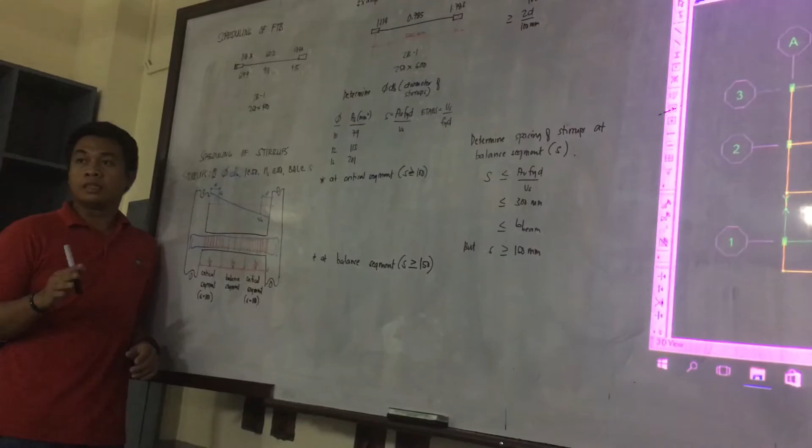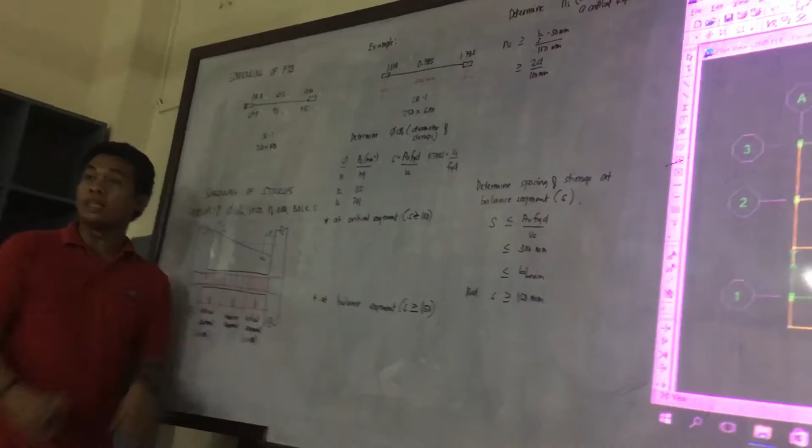Ay, nako naman talaga, oo. Okay, pero sige, I'll add it in. The scheduling of tie beams, the method is different compared to beams in the superstructure.

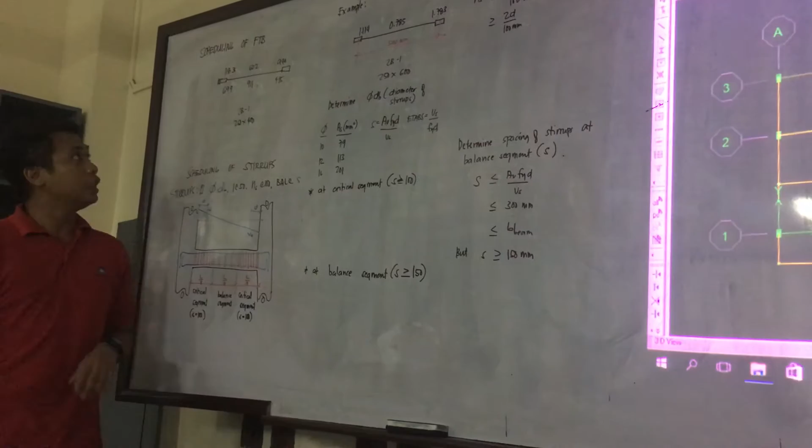Always remember that your footing tie beam is part of your substructure. It is part of the foundation plan. Since it's at the bottom, when there's an earthquake, it is subjected to stress reversal, as it's called.

Stress reversal. I'll emphasize this later on. Stress reversal, okay? Actually, that is the cause of liquefaction.

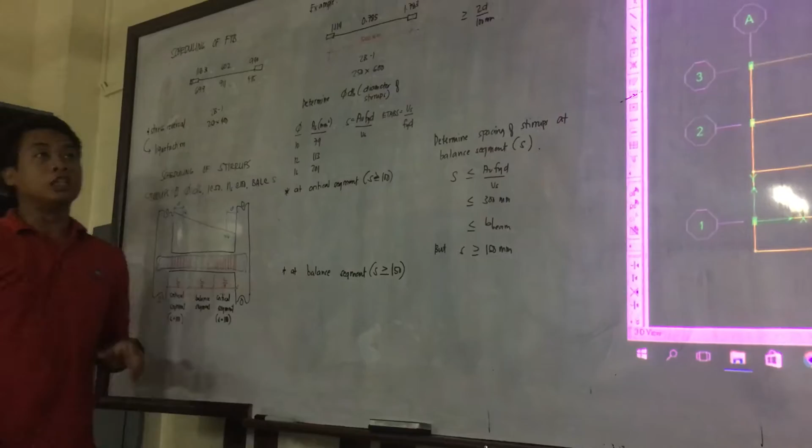Okay, but how do we schedule the footing tie beams first? Let's say, how do I do it? So, how do we schedule it? Normally, in a beam, what we consider is the highest AS.

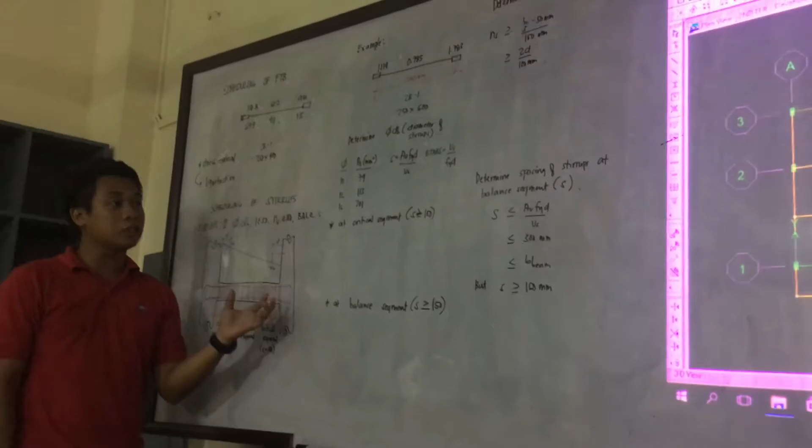Then, from the highest AS, we will determine the diameter of the rebar. Then, we check if it will fit the beam according to the specified spacing of the NSCP. But here, it's still the same. For the whole stretch of the footing tie beam, again, you will consider the highest AS.

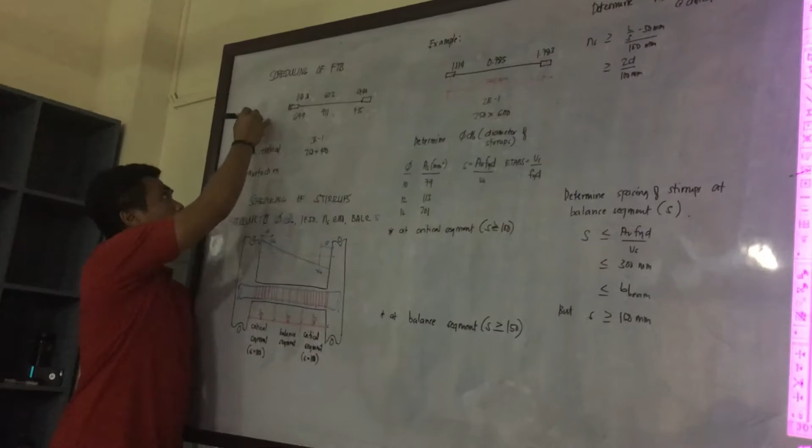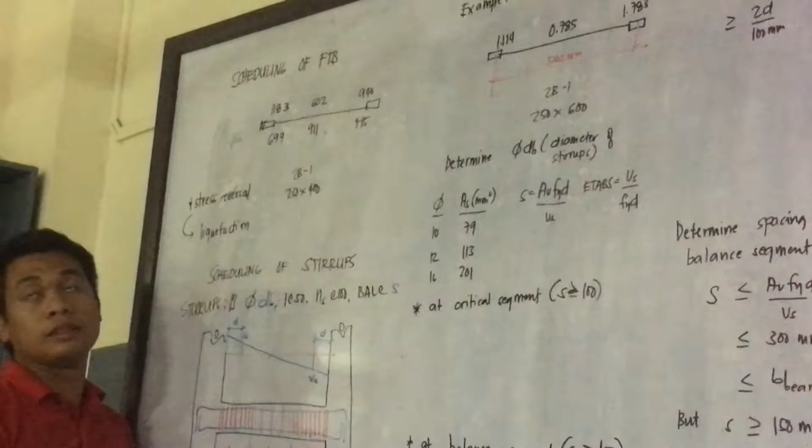So here, what is the highest AS? 1183. So if I supply diameter 16, supposing it fits, how many diameter 16 bars do I need for that 1183? How many? 6, because it's 5 point something, rounded up, it becomes 6.

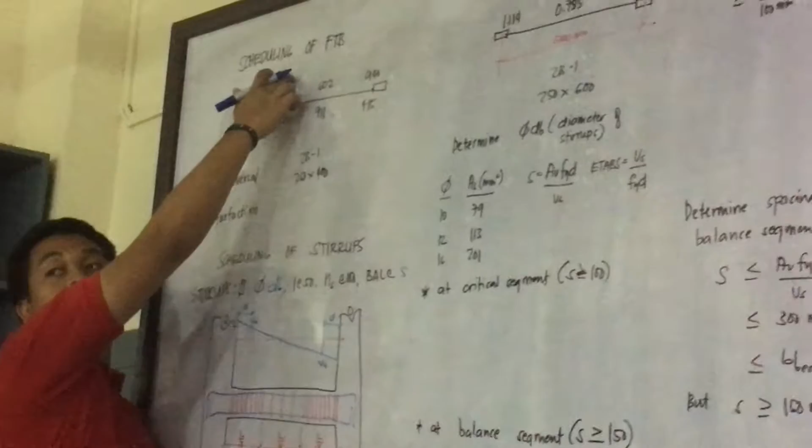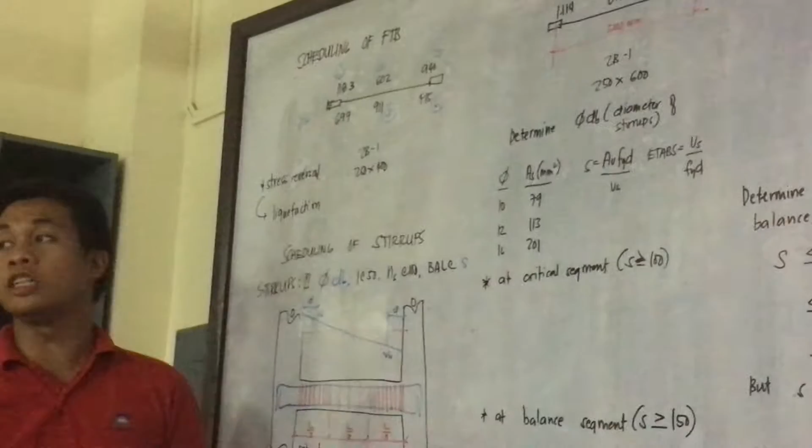Okay, when it comes to the footing tie beam, if the highest number of bars needed anywhere is 6 pieces, then 6 it is, all throughout. So it's easy to schedule a footing tie beam because you will only look for the highest AS, then all throughout, the quantity of bars stays the same.

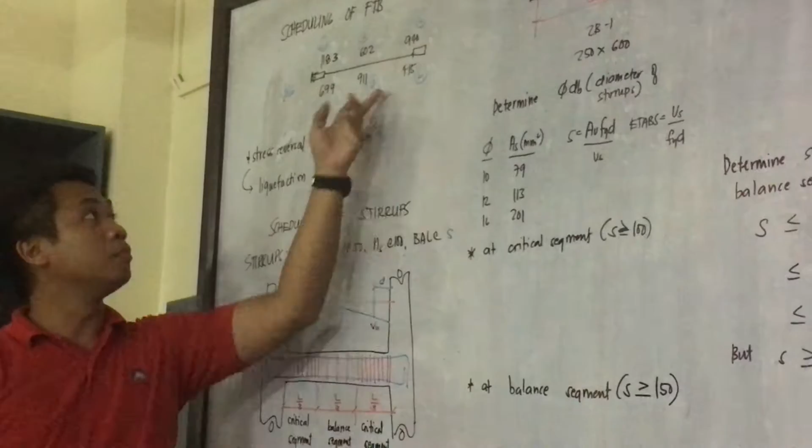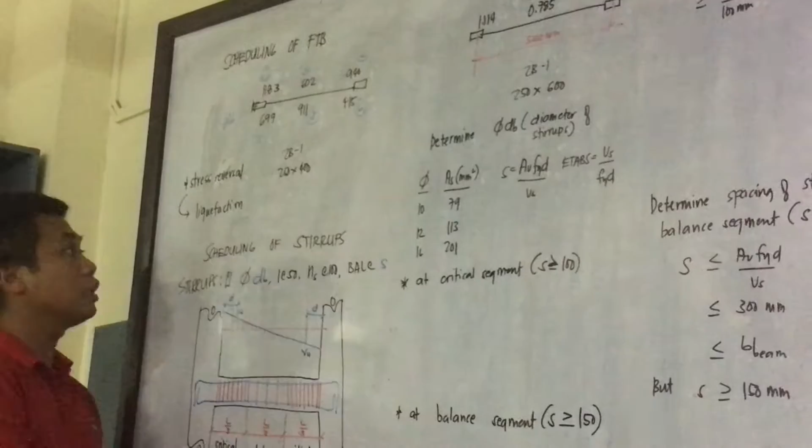Top bar and bottom bar, mid span, discontinuous end, or continuous end. Okay, later on they also put remarks. They put remarks. What is that? They put 'no splices.'

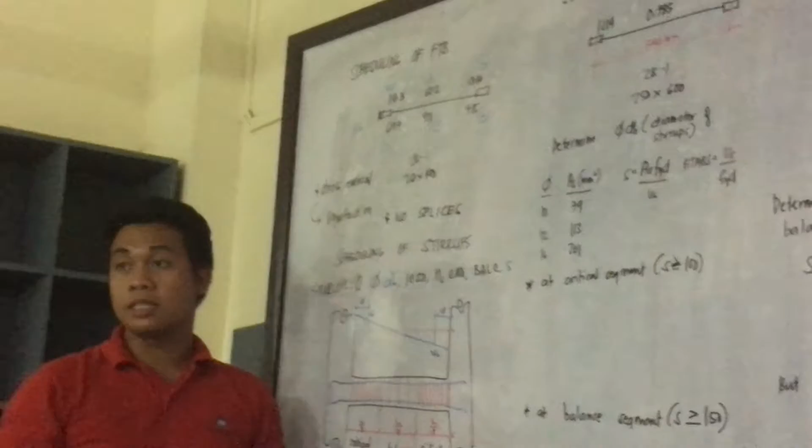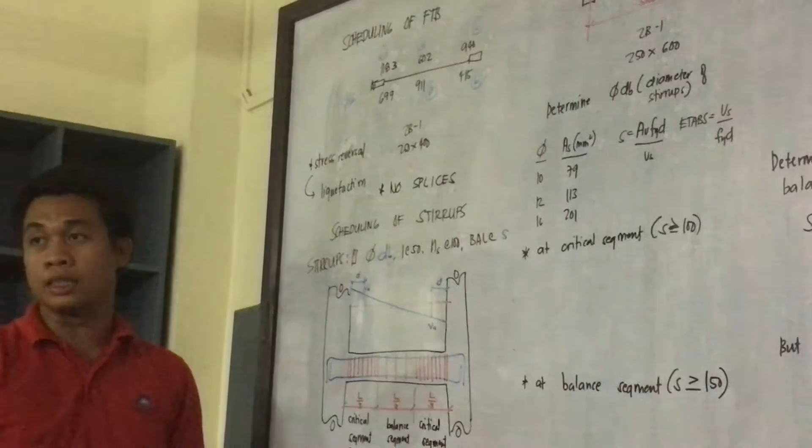Later on, I'll explain this, the stress reversal and the no splices. But let's jump first to the scheduling of stirrups.

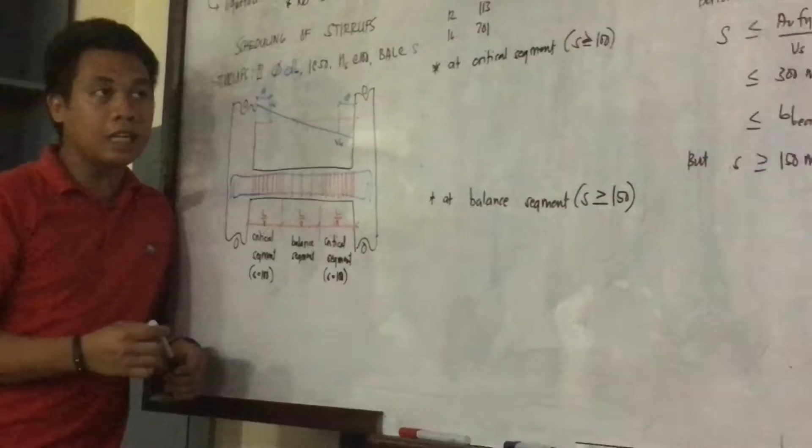Actually, this is the second part, scheduling of stirrups. So, where are stirrups used? They are reinforcing against shear.

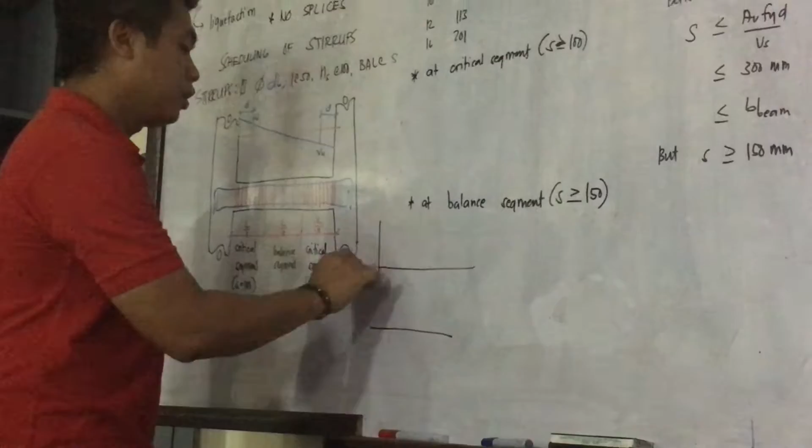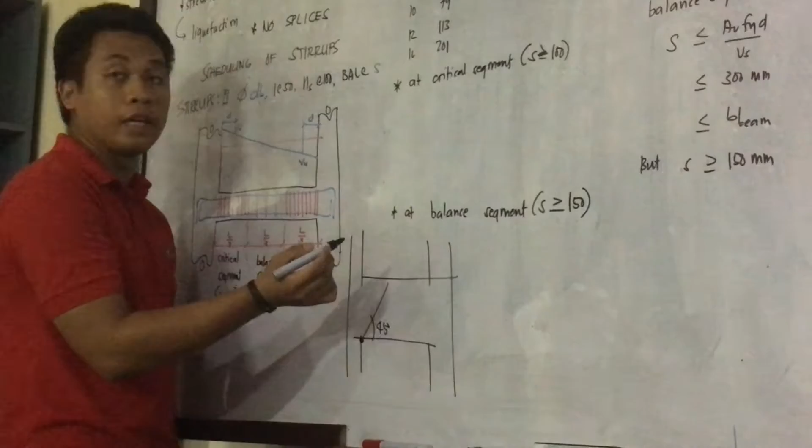Okay, the stirrup crosses it. Then the stirrup will resist the shear failure.

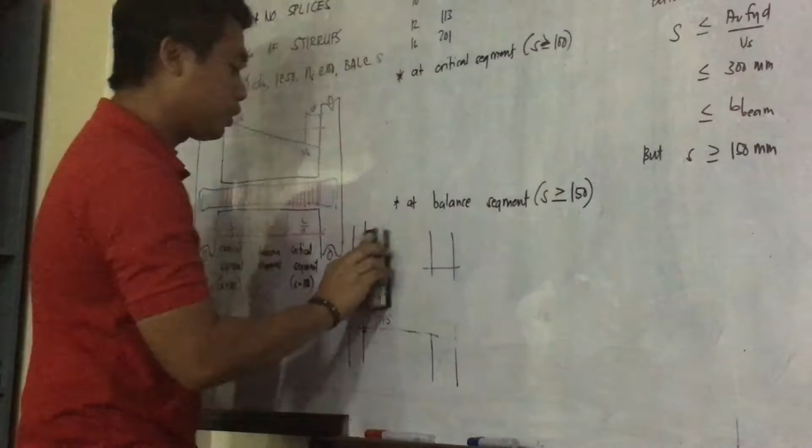Now, when it comes to ETABS, this is your run file. This is your run file. If you want to see the reinforcing of stirrups, we go to Concrete Frame Design, then Display Design Results.

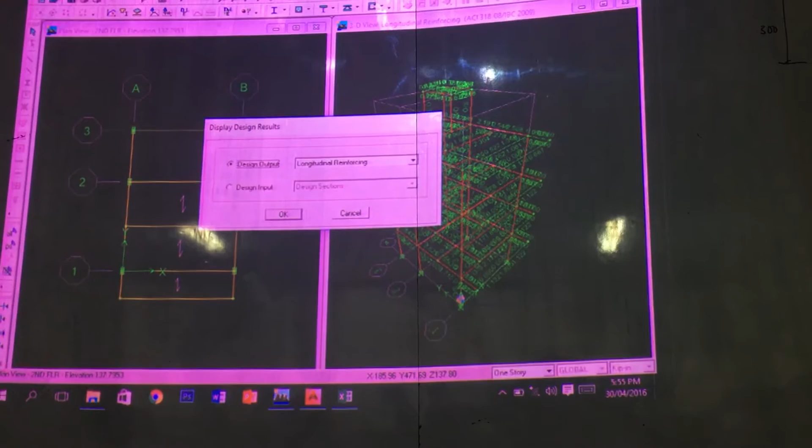Okay, when it comes to ETABS, the shear reinforcement, is it an output or input? Output, because ETABS should be the one supplying it to you. So, in the design output, you choose shear reinforcing, and something like this will show up.

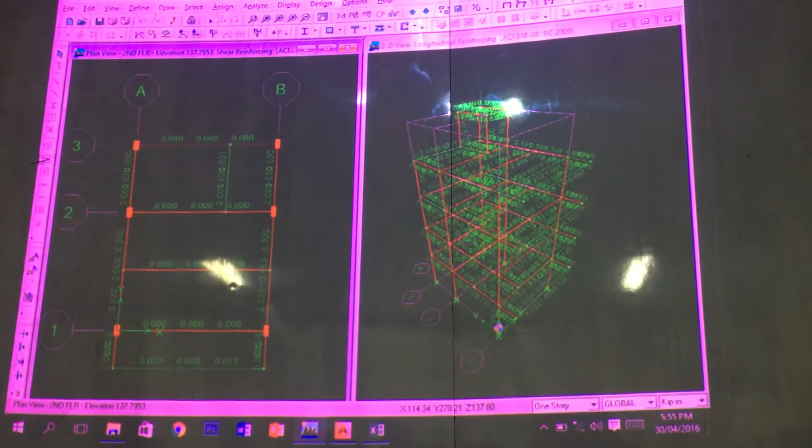Now, per beam, if you notice, how many sets of numbers will you see? Three. Okay, actually those 3 stand for the division of the critical segments of the seismic analysis. So, what is that?

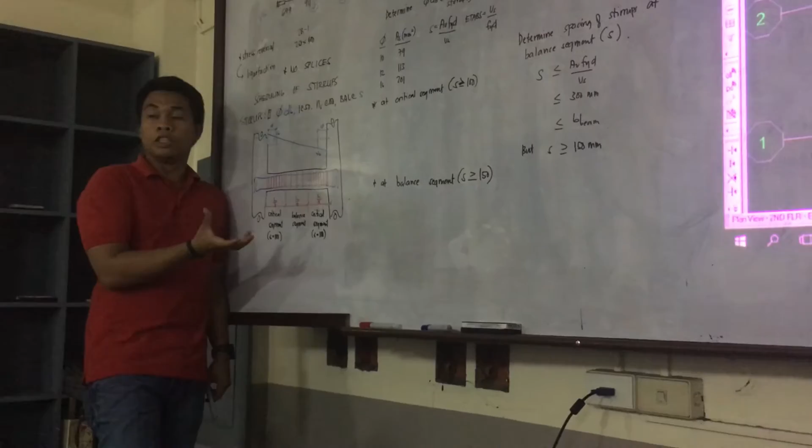According to the ACI, the critical segment will occur at L over 3 near the supports, according to ACI. So here, L over 3, L over 3.

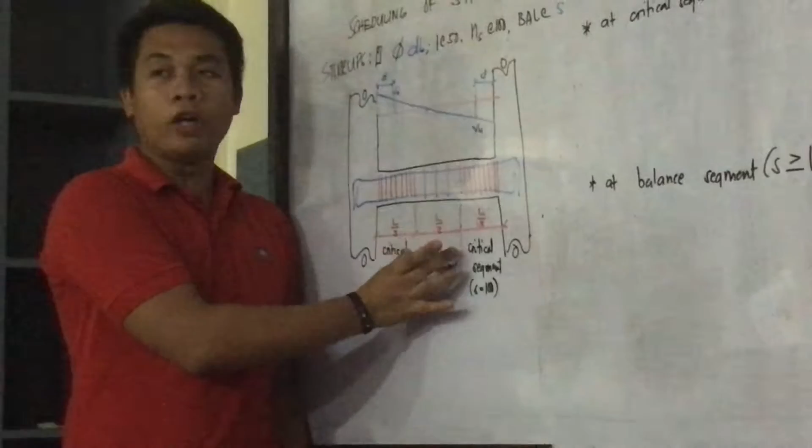Then, the remaining L over 3, that's the point where your shear is low, so therefore this is called the balance segment. These here, the L over 3 near the supports, that's called the critical segment.

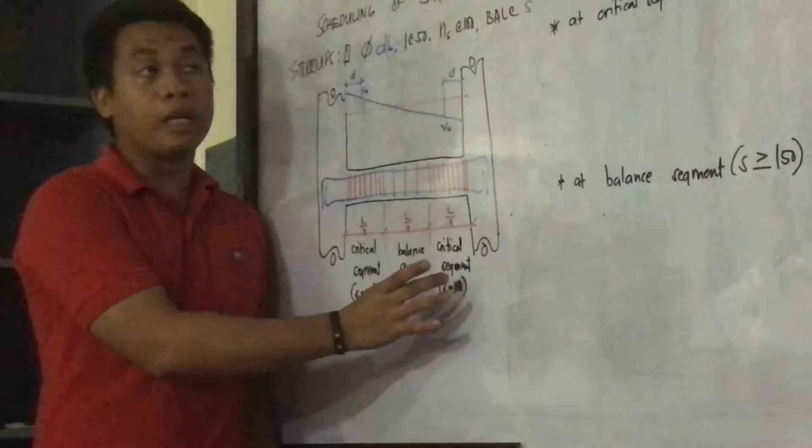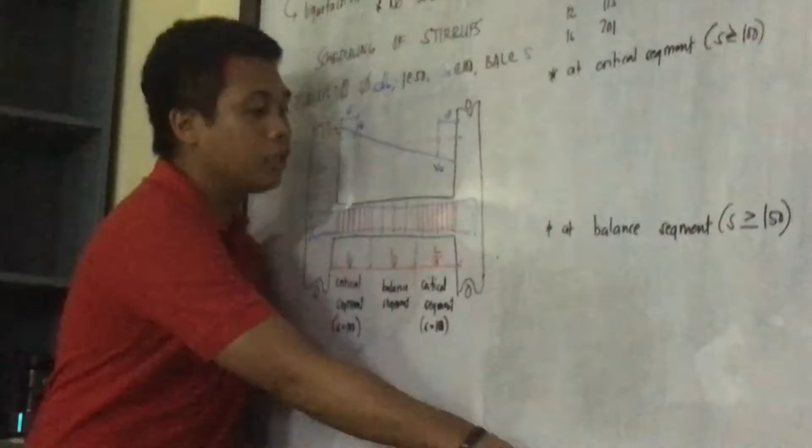Okay, when it comes to the critical segment, your spacing is fixed at 100. Okay, so all the stirrups here are spaced at 100.

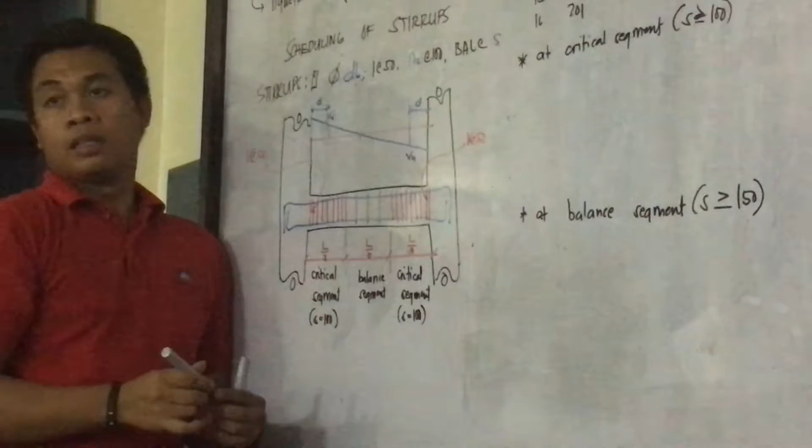Except for one, the first stirrup. Okay, the first stirrup, according to the NSCP, should be offset 50 mm from the face of the support.

So your first stirrup, its distance from the face of the support should be 50 mm.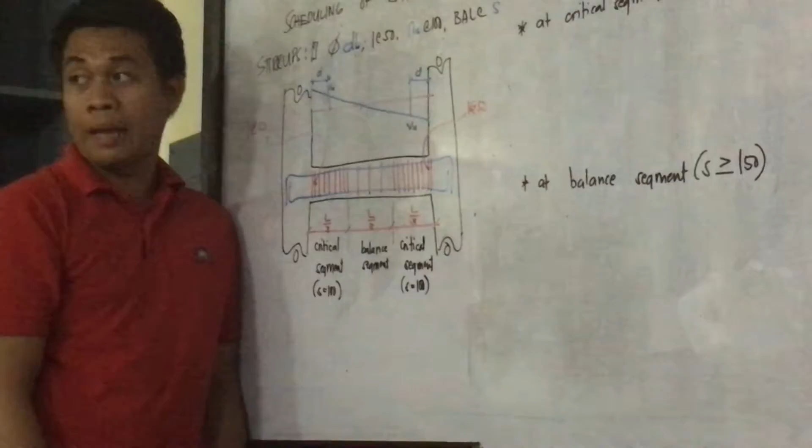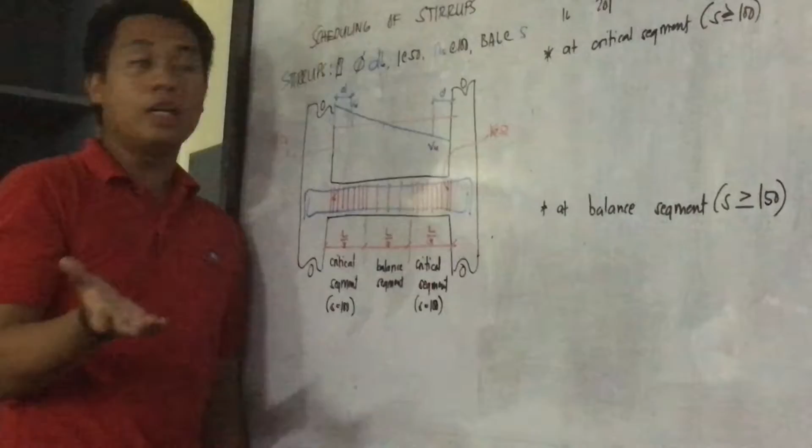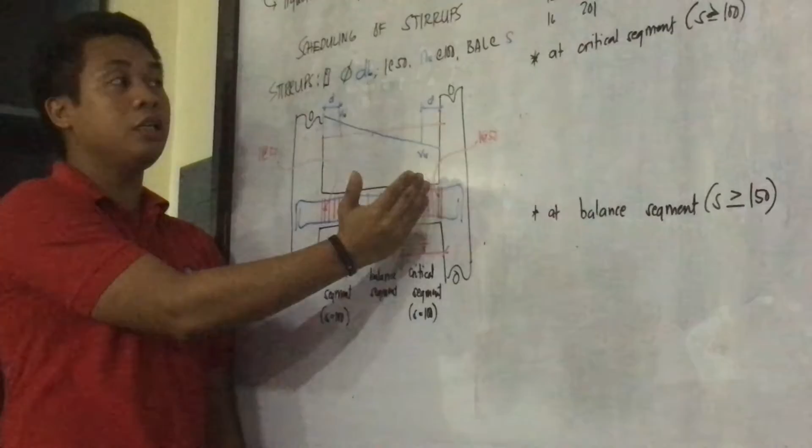First is the diameter of the stirrup, dB. Then 1 at 50 - that's the first offset, one piece, 50 mm from the support.

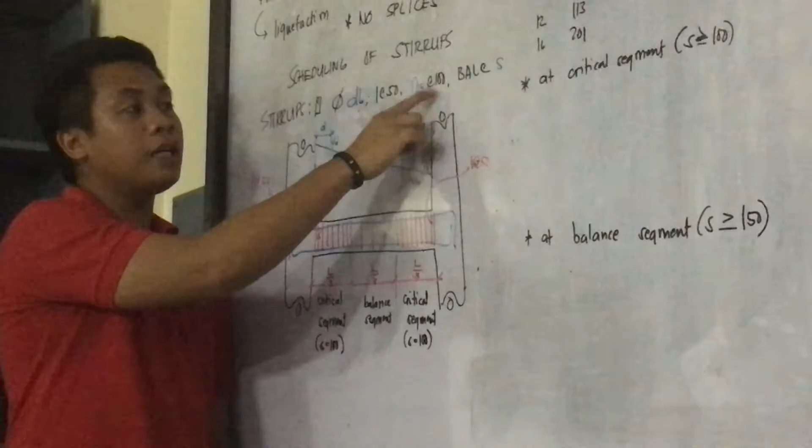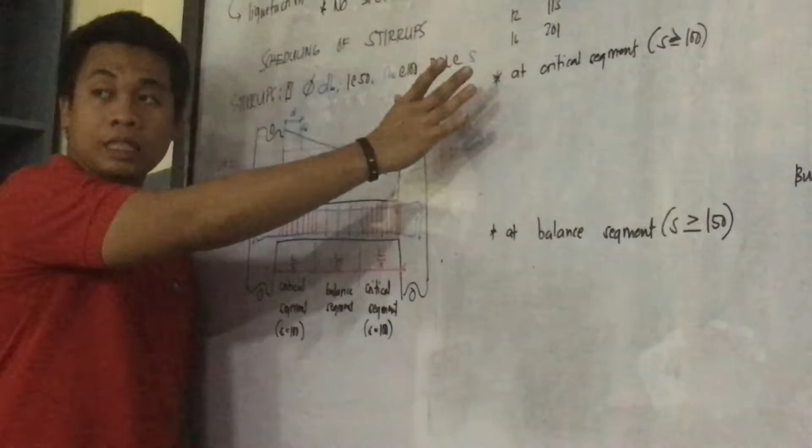Next, NS at 100 - NS is the number of stirrups at 100 on the critical segment, on both sides. Then the balance at S, where S is your spacing - the spacing on the remaining segment, which is the balance segment, serving as fillers in the middle.

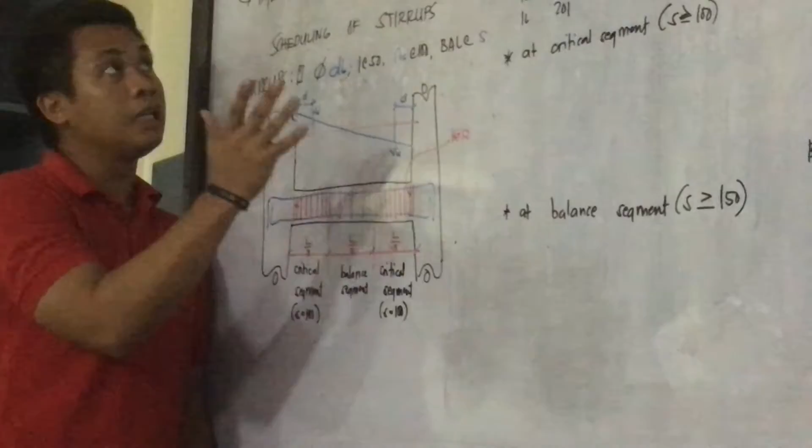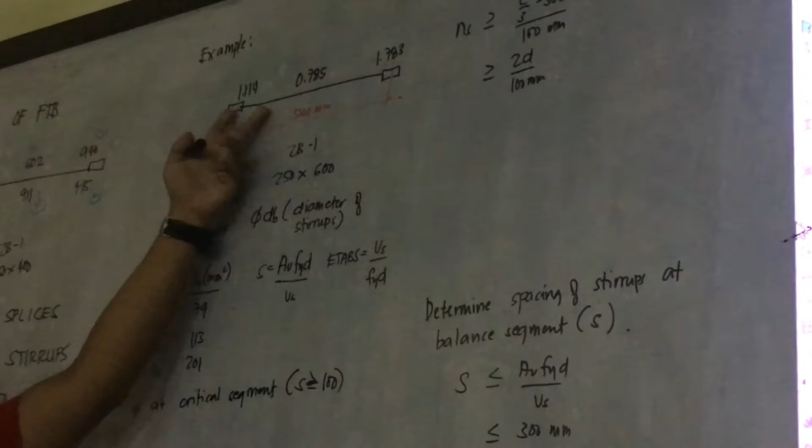Now let's have a concrete example. Here's the beam I've given, with its numbers. As usual, there are three outputs at two points - L over 3 of the beam. So this is 2B-1, with dimension 250 by 600.

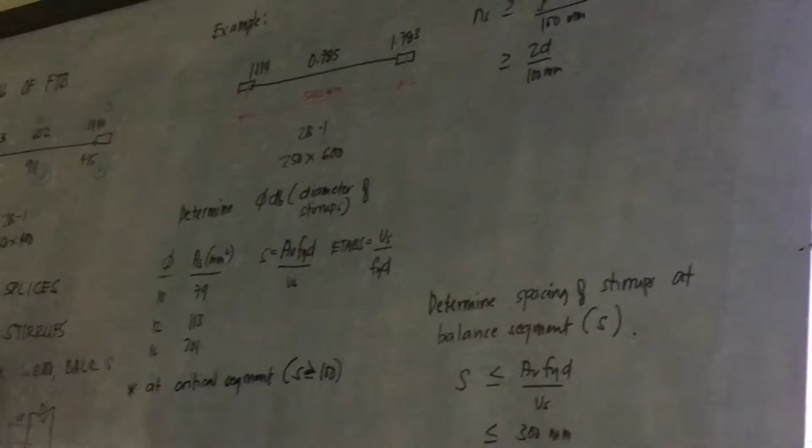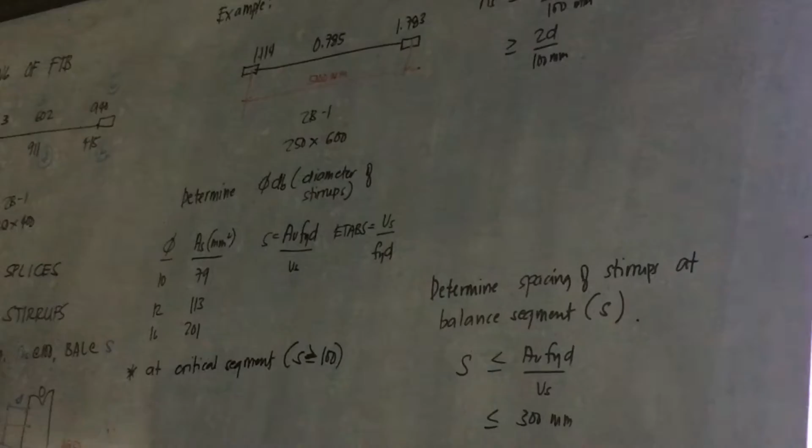So first, what we'll do is determine db, the diameter of the stirrup to be used. What are the diameters of stirrups we use on site? The sizes start at 10, then 12, and if it needs to be bigger, diameter 16.

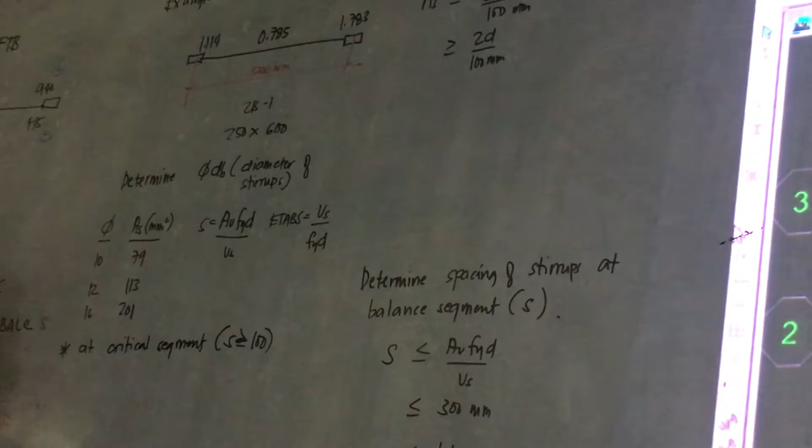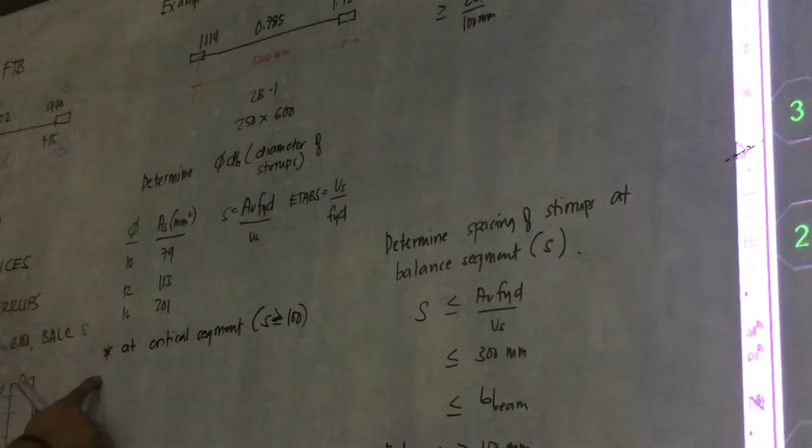Now, in determining the diameter of the stirrups, you need to consider both the critical segment and the balance segment. The critical segment - how many are there? Two, right? For every beam, there are two.

In the critical segment, you only have to choose one. So which one do I choose? Here are the values of the critical segment. Which do I pick, the bigger or the smaller? Actually, the bigger one - you will choose the higher value.

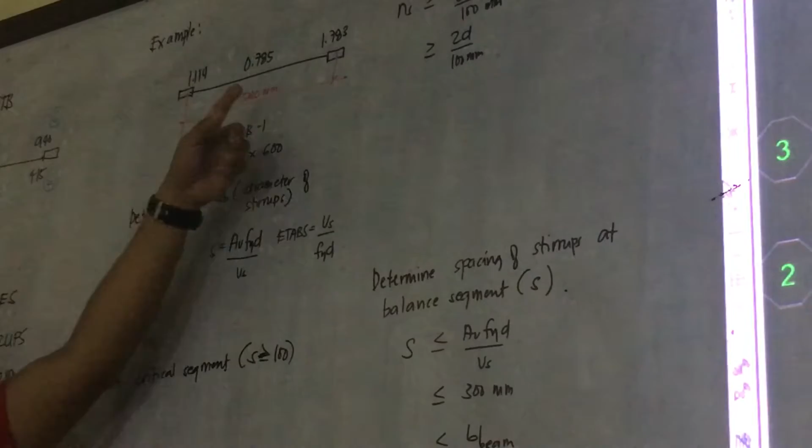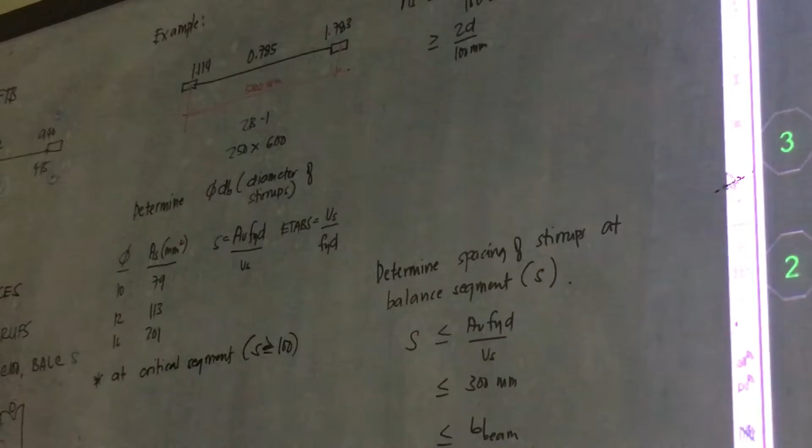I will name these the ETABS results. That's the ETABS result. What does the ETABS result mean? The output values from ETABS represent your VS over FYD. Is this formula familiar to you? This is the formula used in solving the spacing of the stirrups.

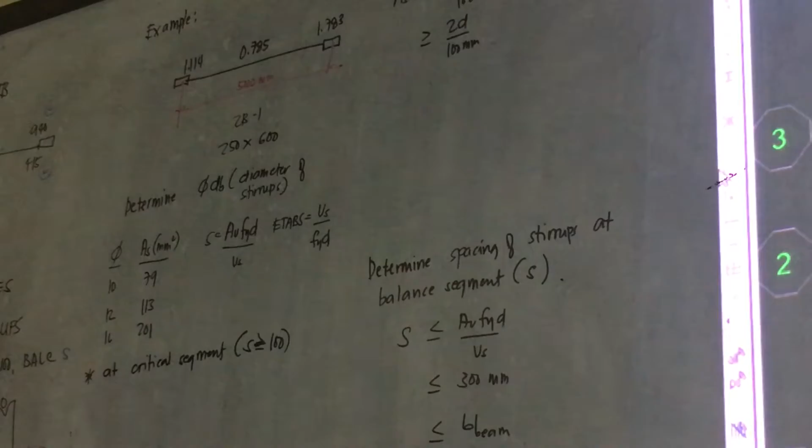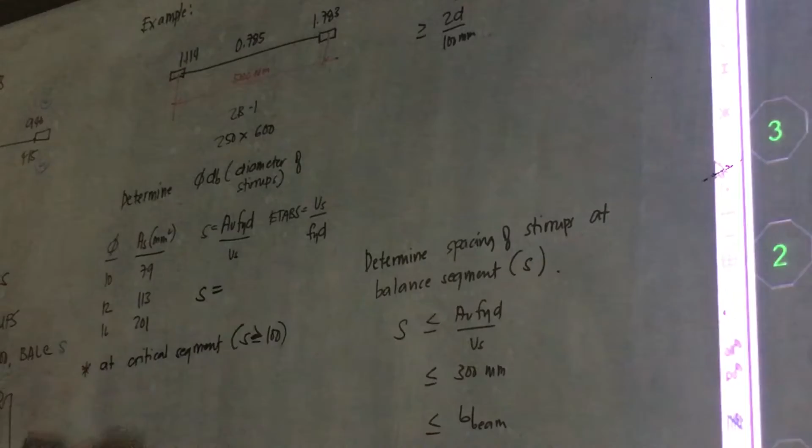Now what if I express S in terms of the ETABS result? How do I rearrange the equation now? I just replace this here.

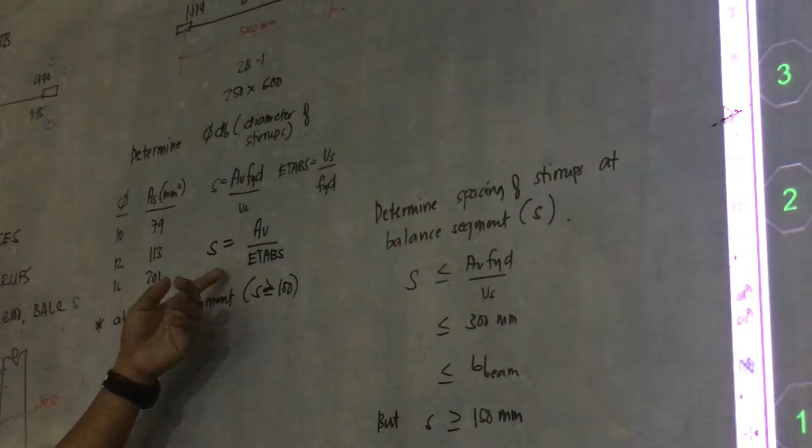So therefore it becomes AV over ETABS result. Simply put, the spacing S can be solved by dividing the area of steel over the ETABS result. So this is the actual calculation.

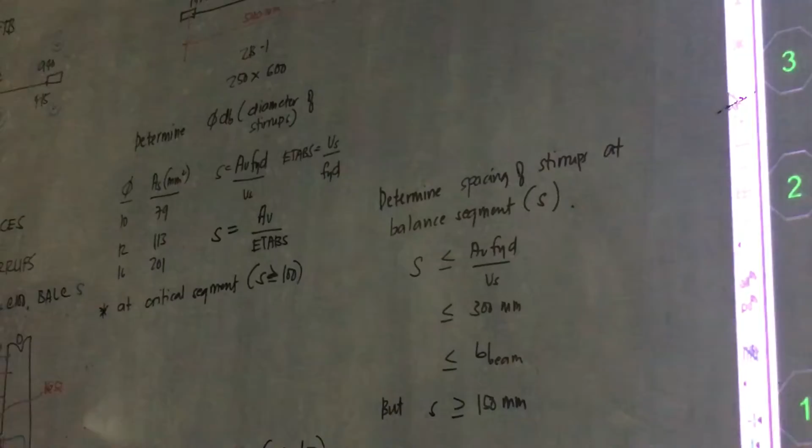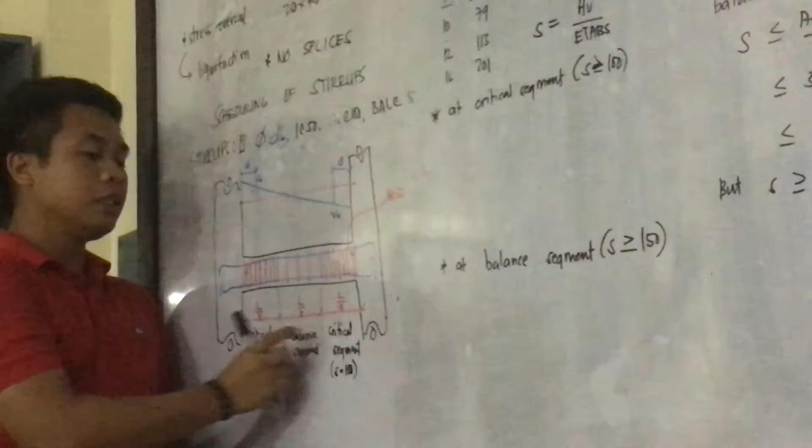At the critical segment, your spacing should be greater than or equal to 100. Why 100? Because as stated, your spacing needs to be around 100 at the critical segment.

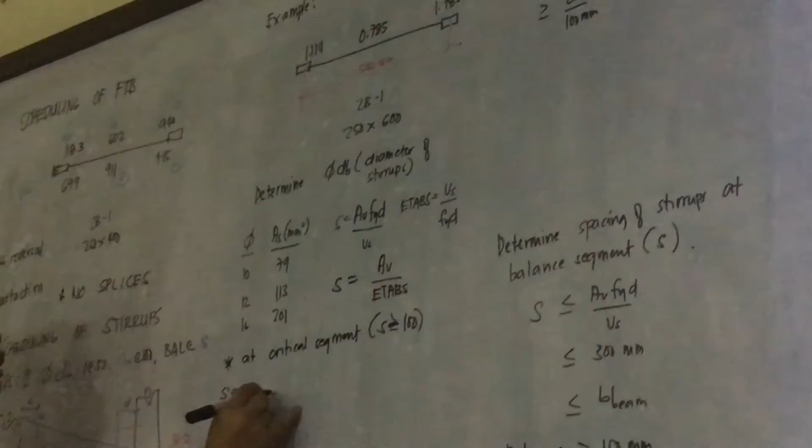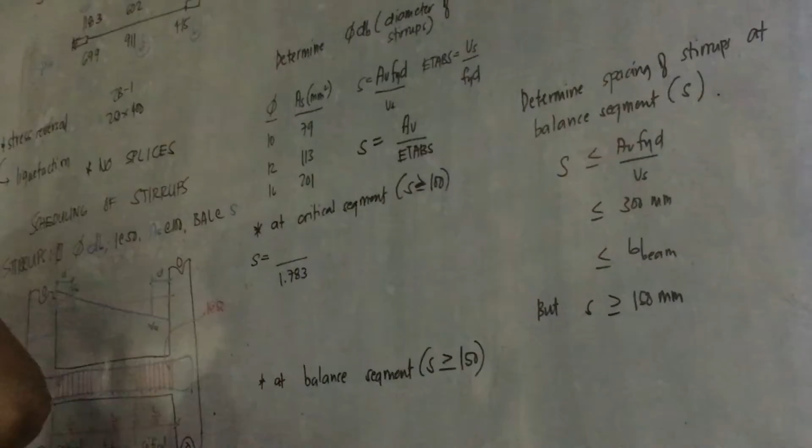Solving for the spacing - at the critical segment there are two values, and we choose the higher one, which is 1.783. How about the AV? That's the area of steel.

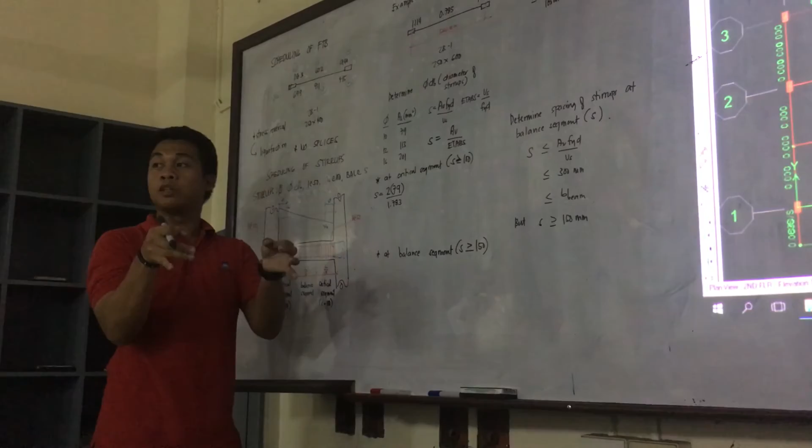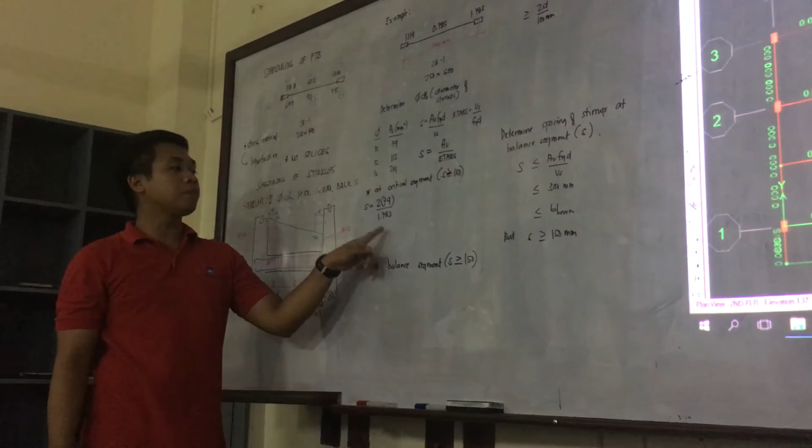Now, solving for the spacing, what's the spacing at diameter 10? Please solve. It's 88.61 mm. Is this greater than 100? Obviously not. So therefore, reject diameter 10. What's next since diameter 10 won't work? Use diameter 12.

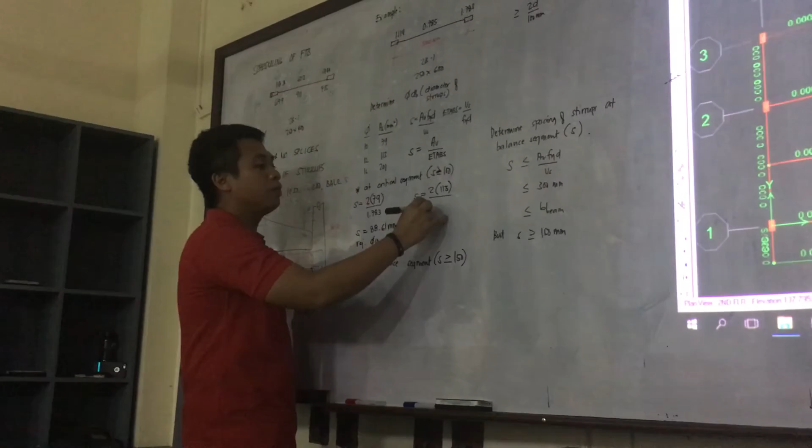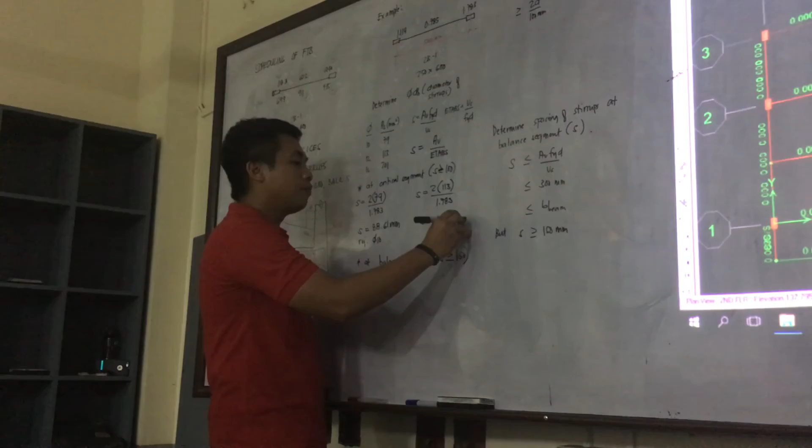If you use diameter 12, what changes? The 79 value changes to 113, divided by 1.78. So the spacing becomes 126.75. Does this pass? Yes, it passes. So if it passes, use diameter 12.